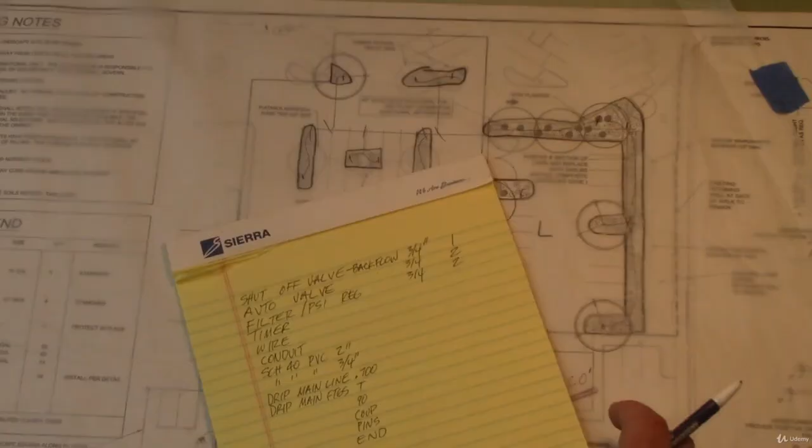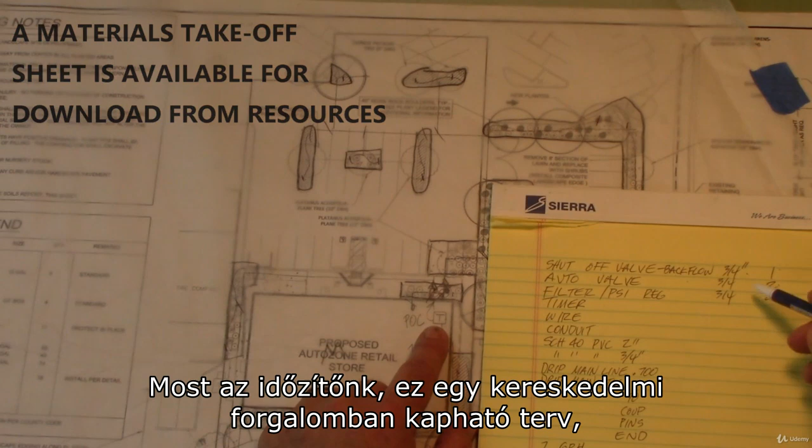When we start with our point of connection, we have shutoff valve and backflow device. We know on this project, our backflow device is taken care of, so we'll list a 3/4 inch shutoff valve, one of those. Here's our automatic valves, 3/4 inch, two of those. Filter pressure regulators, two of those. Now our timer, this is a commercial design, no room for expansion, it's not going anywhere bigger. So we've got two valves. I'm going to pick out a nice 4-station timer.

It's going to be mounted indoors, so I want to make a note of that.

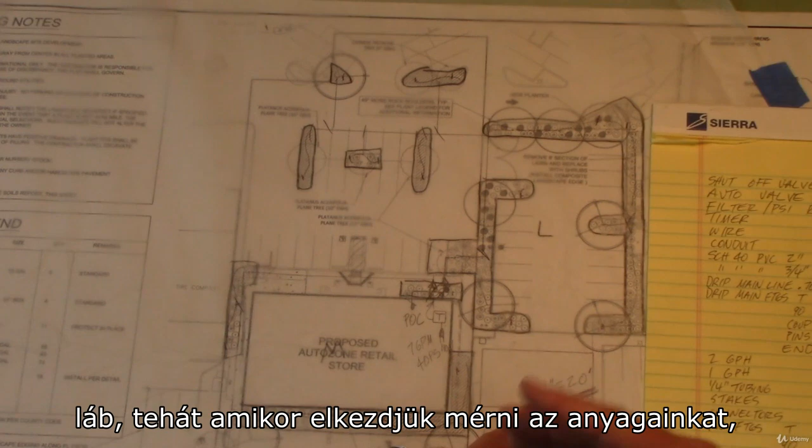Now let's talk about the scale. This drawing is 1 inch equals 20 feet. So when we start measuring our materials, we'll use a scale like this. There's our measurements—for instance, this lateral that comes across here, we can see by scale it's about 4 feet or so.

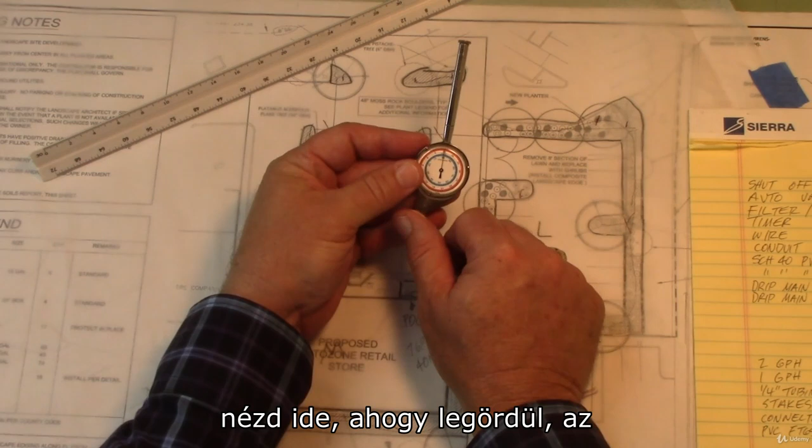Another tool that I like to use is a measuring wheel. If we take a look here as we roll it down, it measures also. Once again we take a look at that same lateral, and it's about 4 inches long.

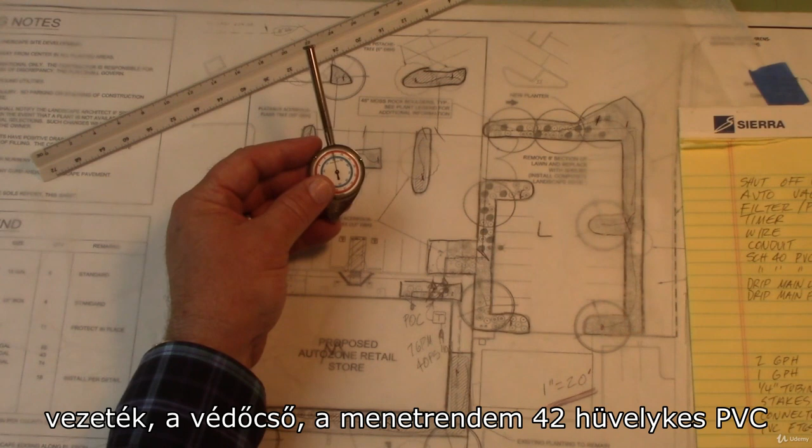So now I'm going to be measuring my wire, my conduit, my schedule 40 2-inch PVC pipe for sleeves, and also all my 3/4 inch pipe for my laterals, and then I'll also be measuring with my measuring wheel all our drip tubing.

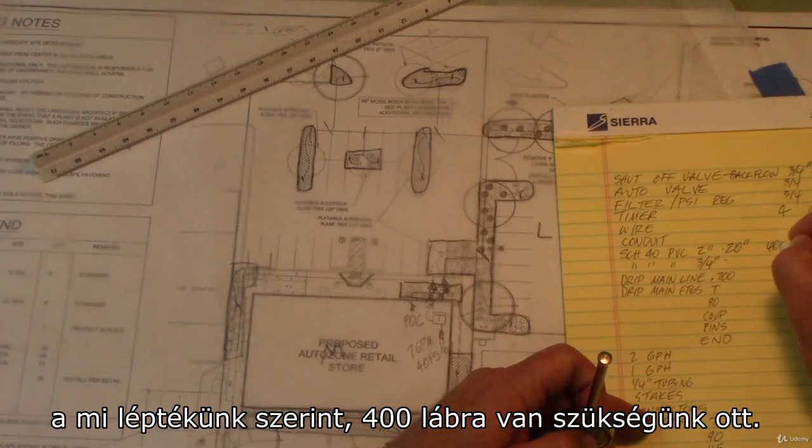So when we've measured for our sleeves, we found out that we have 20 inches times our scale—we knew we need 400 feet there. For our 3/4 inch laterals, we measured 40 inches, so we need 800 feet there. Our drip main line, we measured approximately 40 inches, so we're going to call for 800 feet of drip main line.

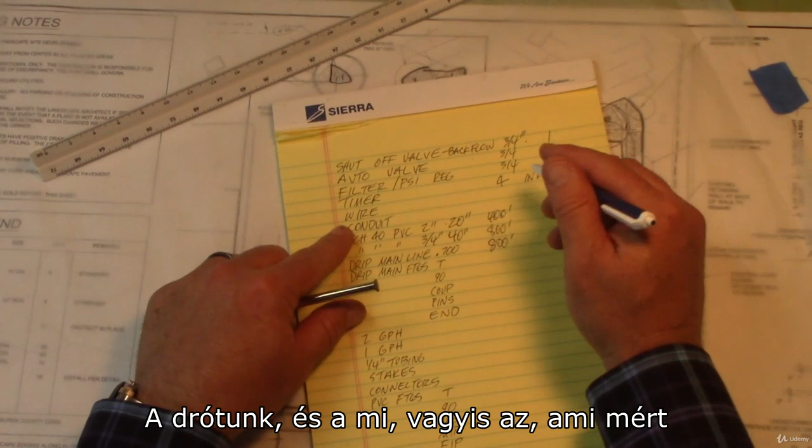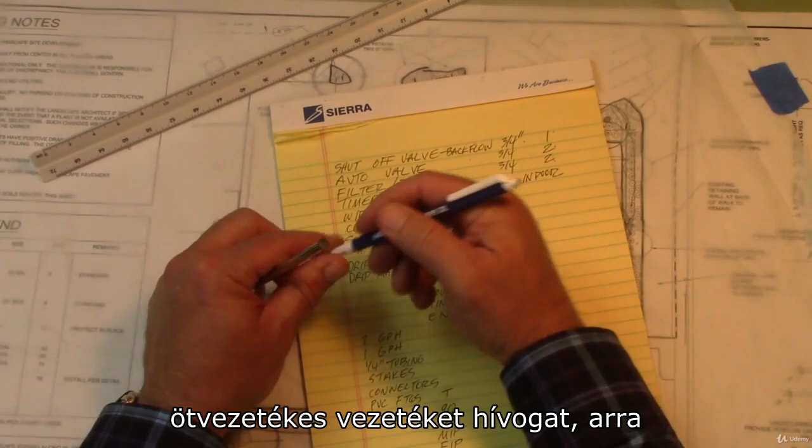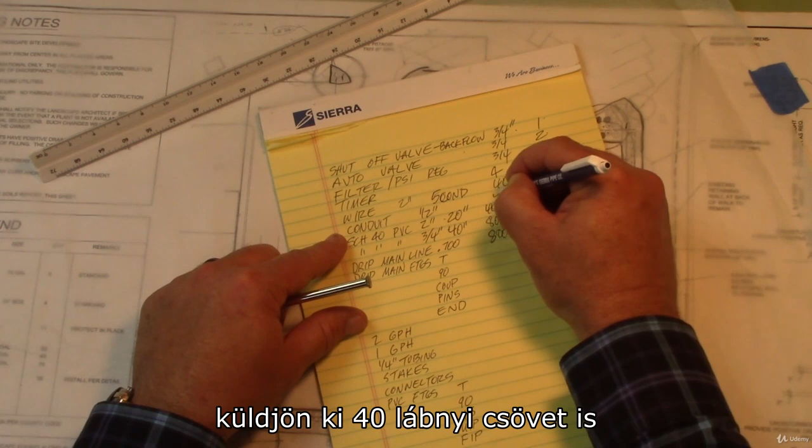Our wire—that measured out 2 inches, which equals 40 feet. We have a 4-station timer, so I'm calling out for 5 conductor wire. That way, if we ever do decide to expand, we can. Conduit, that'll be 1/2 inch, and we'll also send out 40 feet of conduit for our signal wire.

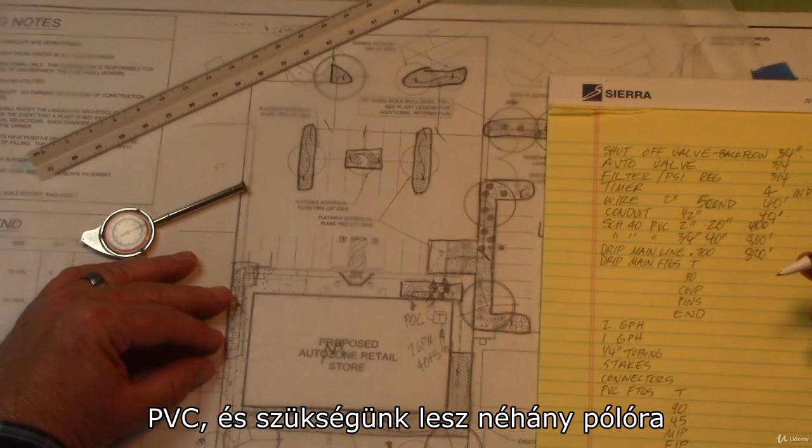Now I'm going to go through and take a look at all the fittings we'll need for our actual drip tubing, our emitters, and 1/4 inch line—everything we need there. Our drip comes off of our PVC, and we're going to need some T's there. If we remember our design, we T in at 8 different places, so we're going to have 8 of those.

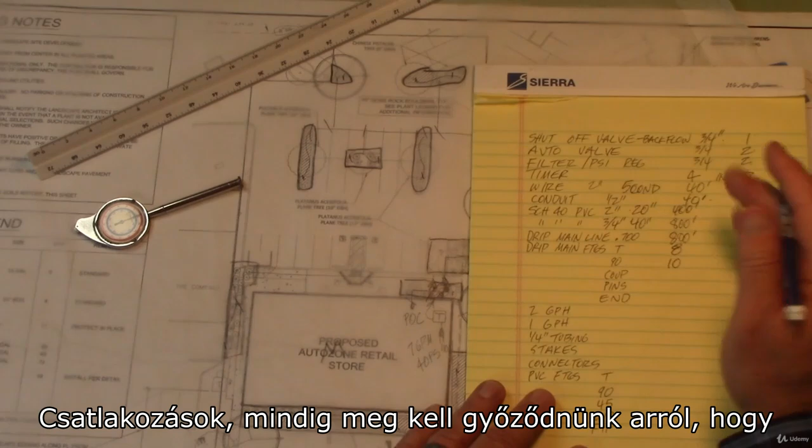We have some 90s, so I'm going to throw in a handful of those, probably about 10 or so. Couplings, we always need to make sure we got couplings around, so I'll throw in a handful of those. Now pins—these are staples that help hold down our drip tubing—those come usually in a package of 100.

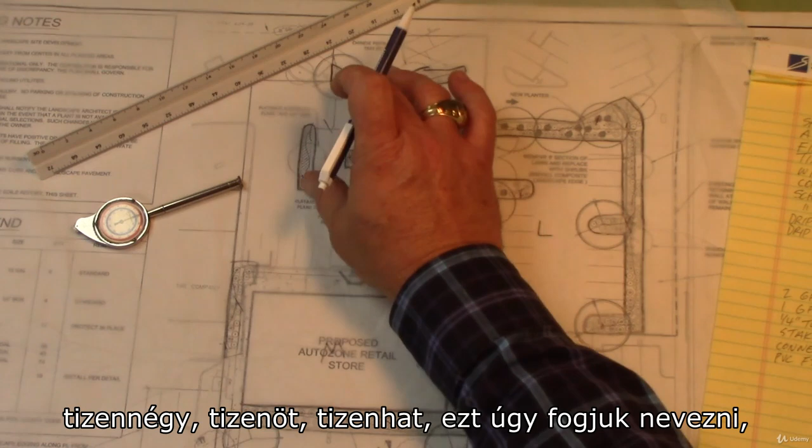Ends, let's take a look at our design. We count 1 through 16 ends. We're going to call this, we're going to have about 25 of those.

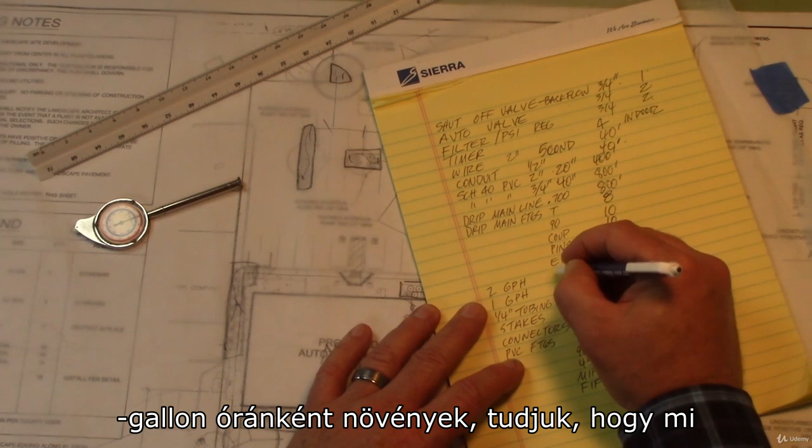We're going to go to our plants list. We know that of our 2 gallon per hour plants, we have 120 of those. And of our 1 gallon per hour drip emitters, we go to our plants list, we see we have 135. 1/4 inch tubing.

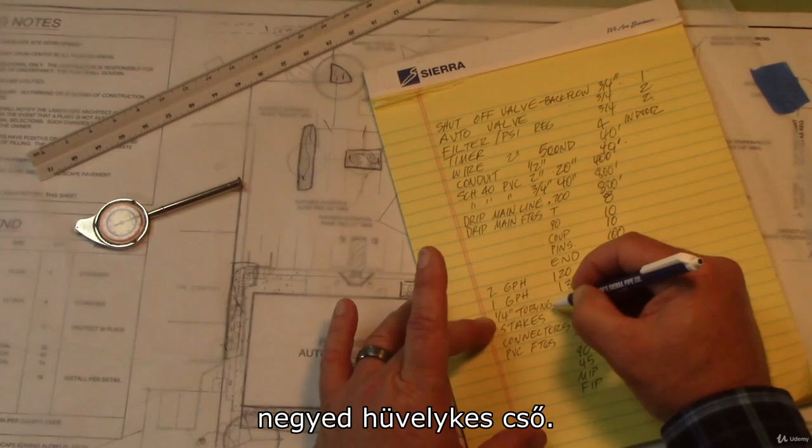Let's talk about doing the takeoff for our 1/4 inch tubing. We know from our design that we have 255 total plants. If we average about 2 feet per plant, we're looking at a little over 500 feet in drip tubing.

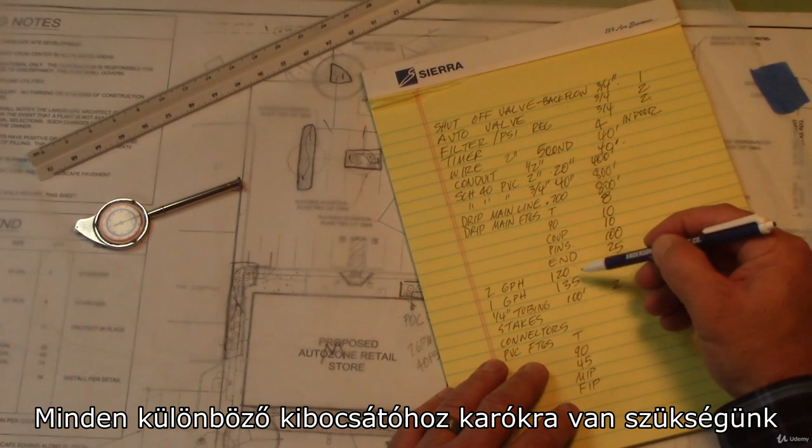We like to get it in 100-foot rolls, it's easy to work with. So in my design, if we have a little over 500 feet, to make sure we're covered I'm going to pencil in that we need 6 100-foot rolls of our 1/4 inch tubing. For all the different emitters, we need stakes and connectors. Those come in packages of 100, so we'll call that 300 and 300.

Now we're going to take a look at our PVC fittings for our laterals to go out. We're going to need T's for all these different junctions for breaking out, elbows for corners, 45s to get around different things. Even though if we take a look at our drawing we don't show any 45s, in the real world we know we'll need a handful of those. We'll also need male adapters for our automatic valves, and male and female adapters for our filters and pressure regulators.

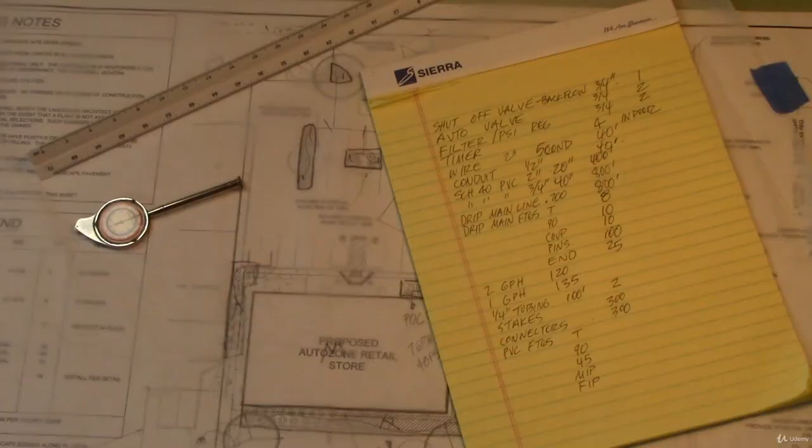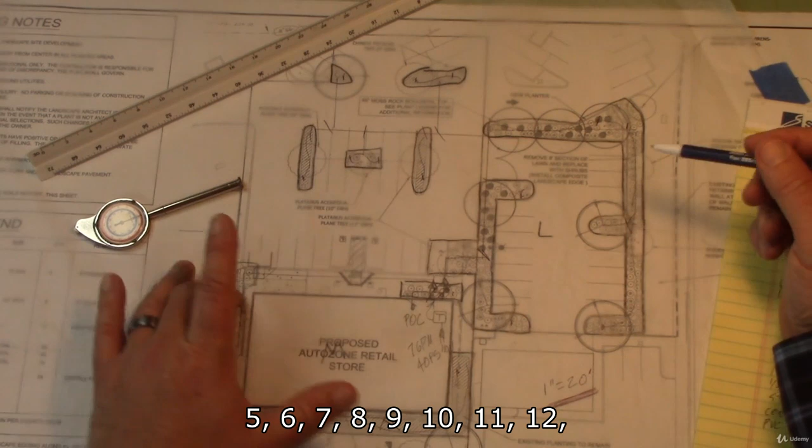So as we take a look at our PVC fittings, we start off with T's. We're going to count the valves every time we branched off for our laterals. So we go through and count 12. We're going to write down 15, always to have a couple extras.

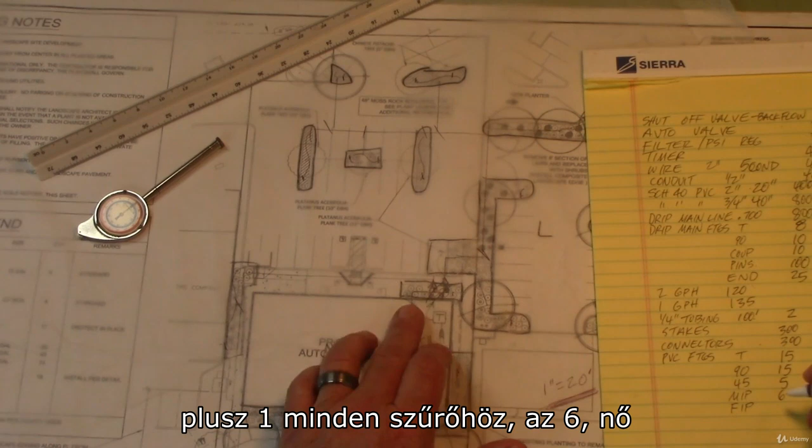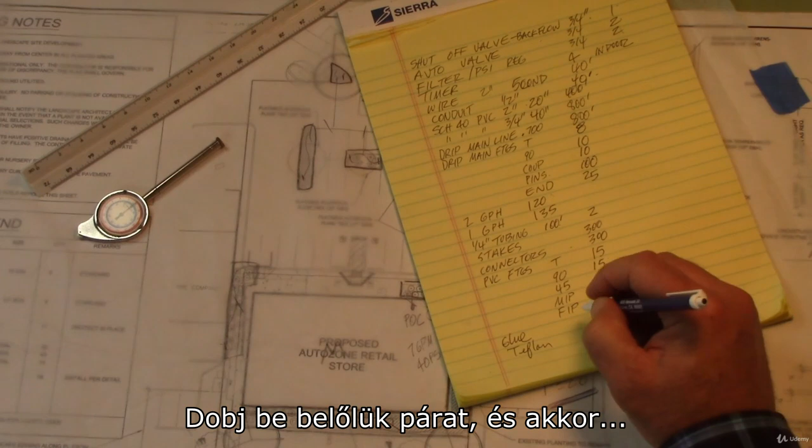As we take a look at our design, we count and go through—looks like we need about 15 90s. We'll throw in 5 45s. Males, 2 for each valve—that's 4, plus 1 for each filter, that's 6. Female adapters, we're going to need 2 of those. We're going to need glue and probably some Teflon tape—throw in a couple of those, and let's throw in 2 pints of your favorite glue.

Now we have a list that we can take to our irrigation parts store, down to the hardware store, get your list together, and we can start building a budget.

Now that we've done our materials takeoff, we're going to move on to our next lesson, and see you next time.